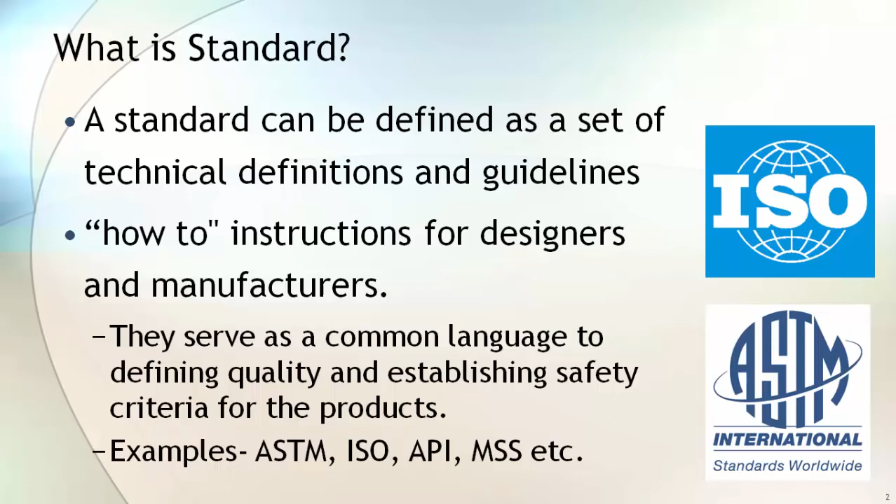ASTM, API, MSS, ISO are some of the examples of standards. ASTM has more than 12,000 standards. They cover almost everything. If you visit the ASTM website, they say they have a standard from toy to aircraft.

Why is this standard required? Let's take an example of a mobile phone travel charger. If you are in the US and traveling to India, you need an adapter to use this charger in India, as both the countries follow different standards for power sockets. But your USB cable will work anywhere in the world because it is manufactured as per a globally accepted standard.

In case of process industry, we want all the piping material, irrespective of their country of origin, to fit perfectly with each other when they come to the site. Standard helps to achieve this by establishing engineering or technical requirements for product, practice, method or operation. Standard builds confidence about product quality in the users. With standardization, cost of production will reduce as you can produce in bulk for a global market.

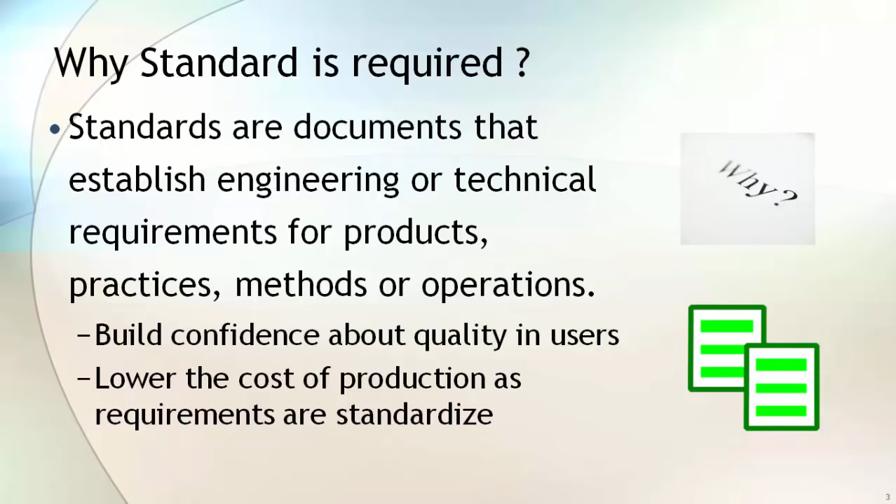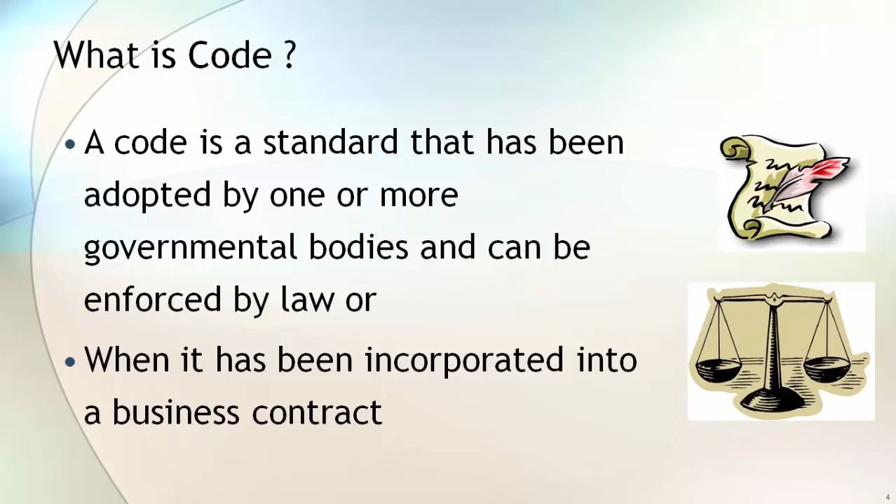When a standard is adopted by a government body and becomes legally enforceable, or when it has been incorporated into a business contract, the standard will become a code. ASME codes are legally enforceable in many US states, whereas other parts of the world have their own similar codes. Please note that the requirements mentioned in the code will only be mandatory if the code is adopted as a law by a regulatory body or if it is part of a business contract. Otherwise, code will serve as generally accepted guidelines for design, fabrication, construction and installation.

However, almost all process facilities follow various American codes and standards in addition to their national standard. Some examples of codes are ASME Boiler Pressure Vessel Code, British Standard, DIN, Indian Standard, etc. DIN is a German national standard.

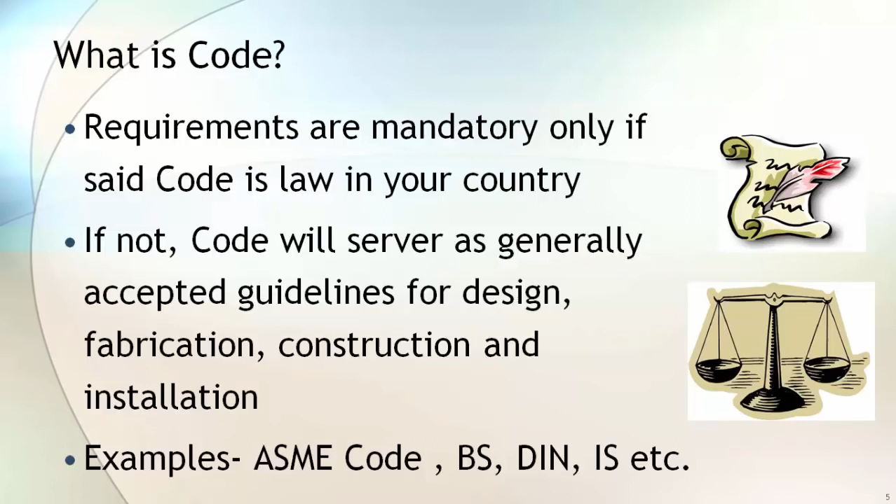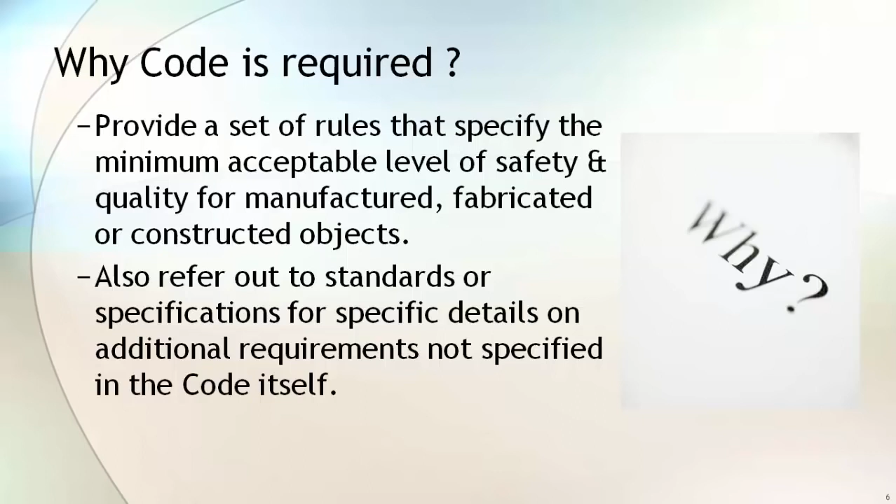Why is code required? Code provides a set of rules that specify the minimum acceptable level of safety and quality for manufactured, fabricated or constructed goods. It also refers to a standard or specification for specific details or additional requirements that are not specified in the code itself. What is specification?

Specification provides specific additional requirements for the material, components or service that are beyond the code or standard requirements. For example, if you want A106 Grade B pipe with maximum carbon of 0.23% against the standard requirement of 0.3% max, you have to specify your requirement in your specification or in a purchase order. Specifications are generally generated by private companies to address additional requirements applicable to specific products or services.

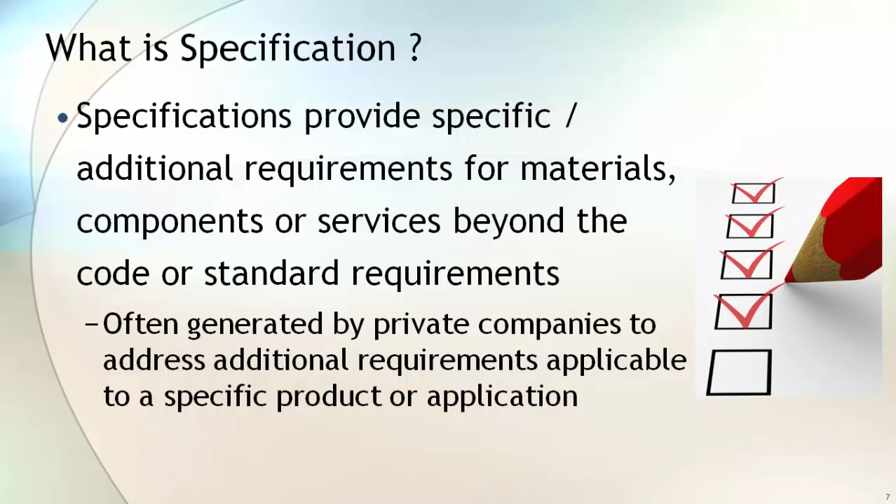Why is specification required? Specification allows the purchaser to include special requirements as per the design and service condition. It allows you to customize your product. Please note, requirements in specification are must-meet requirements.

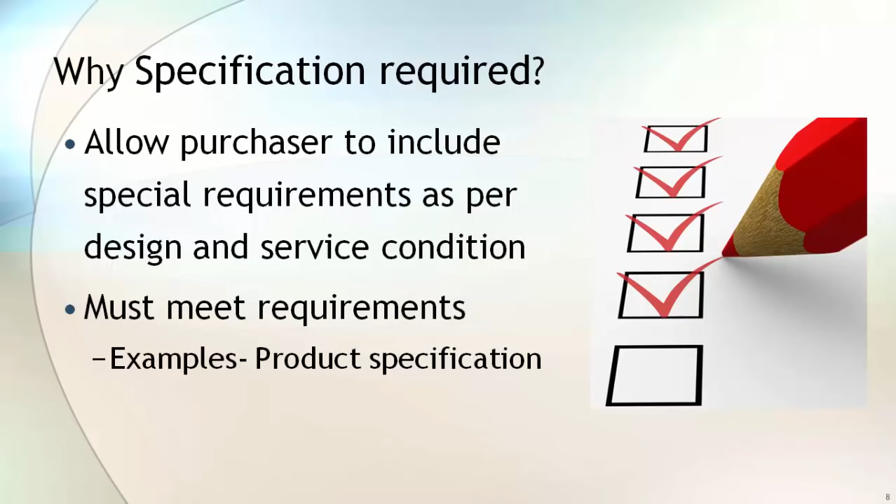To simplify understanding of code and standard, I have grouped them in three categories. First is system design code. This category of code provides entire system design requirements. ASME B31 series and ASME Section 8 are some examples of system design code.

Second is the material standard that provides standard material grades that can be used in manufacturing of piping components or any other systems. ASTM Section 1, Section 2, and ASME Section 2 cover various acceptable material grades that can be used in a system design. The last on the list is dimensional standard. Dimensional requirements of standard piping components are covered in various dimensional standards. ASME B16 series is an example of the various dimensional standards.

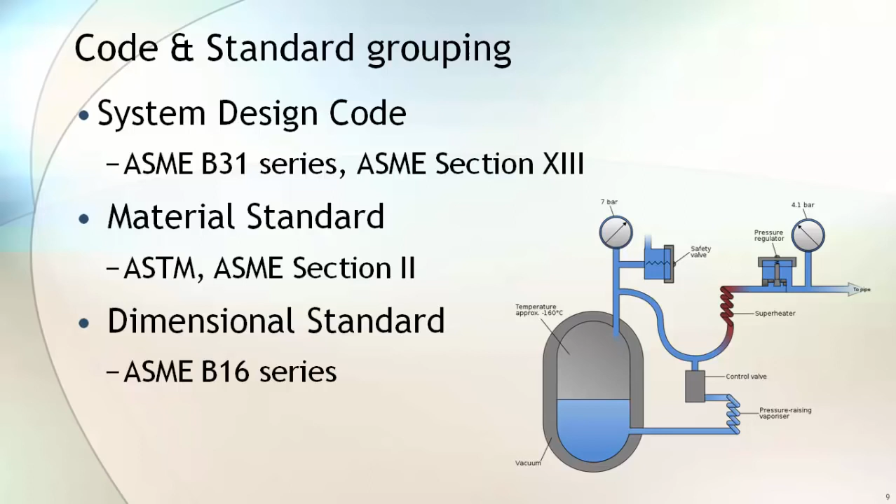To construct a safe and reliable process plant, you will require all three categories of code and standard during design, fabrication, construction and installation. System design code covers requirements for material that can be used in various process conditions, different types of components that can be used, how to design the system, how to fabricate and assemble, installation requirements, and it also covers the inspection and testing requirements for the entire system.

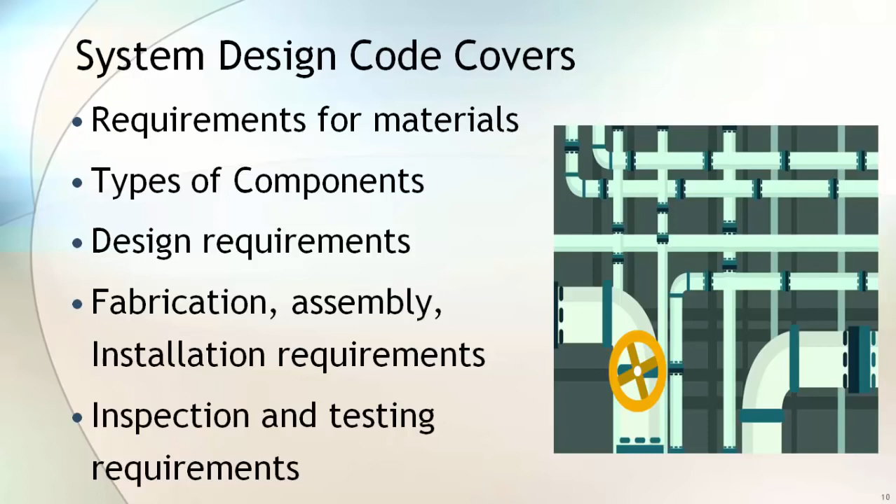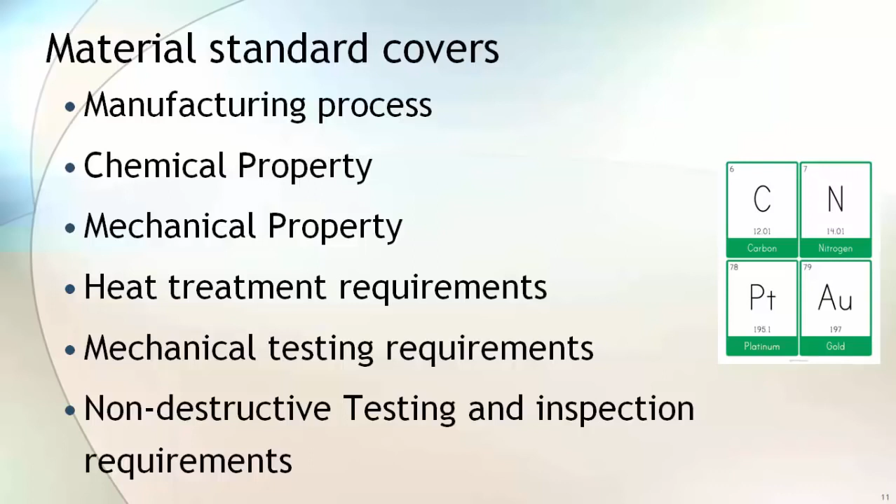Material standard covers the manufacturing process of raw material and the finished product. Material standard also gives the requirements for chemical and mechanical properties required in the finished product. It also suggests various heat treatments to be performed during the manufacturing of the product. Material standard also gives the requirements for mechanical testing, non-destructive testing and various inspection methods to be performed during the inspection of the product.

Material standard also gives the various acceptable tolerances of imperfection. When an imperfection is beyond the acceptable limit, it is known as a defect. Standard covers various defect repair methods and acceptance of that defect repair. Standard also gives the various marking requirements.

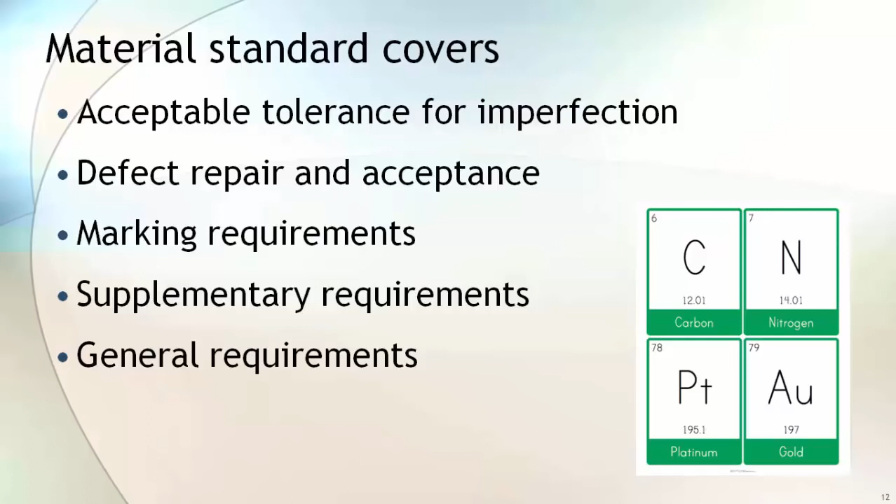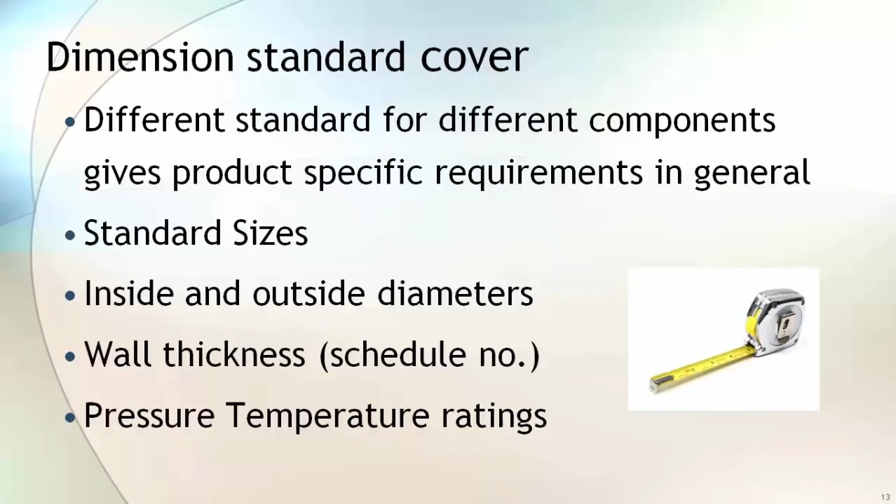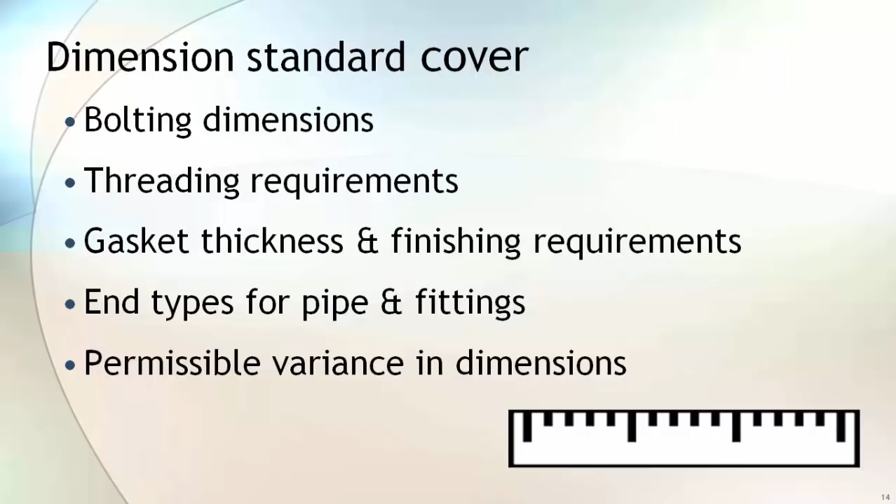Different dimension standards are used for different components. This standard gives product-specific requirements. In general, dimension standard provides size, inside-outside diameter, wall thickness, and pressure-temperature rating. For flanges, it also provides bolt hole diameter, various bolting requirements, threading requirements, gasket thickness and finishing requirements, and different types of ends for pipe and pipe fittings. Dimension standard also lists various permissible variations that are acceptable within the dimension requirement.

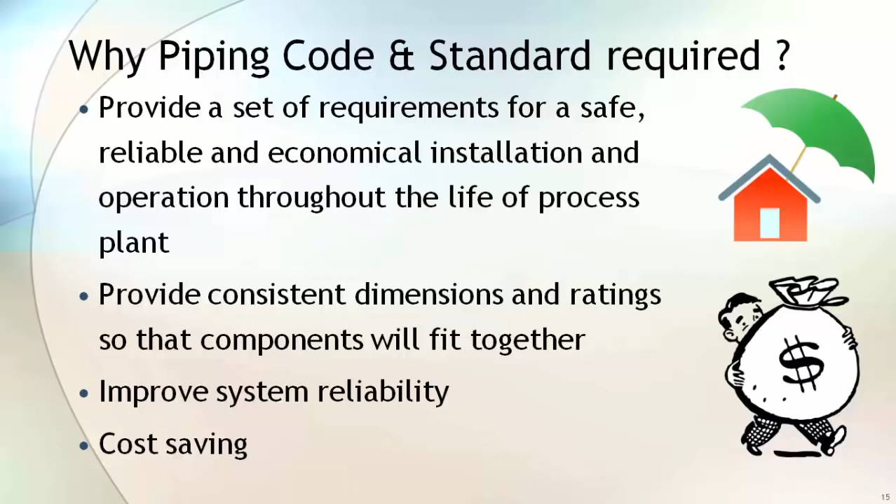Why are piping code and standard required? This standard provides a set of requirements for safe, reliable and economical installation and operation of the process plant. Code and standard ensure consistent dimension and rating so that components will fit together and improve system reliability. With standard components, less inventory is required and that saves cost also.

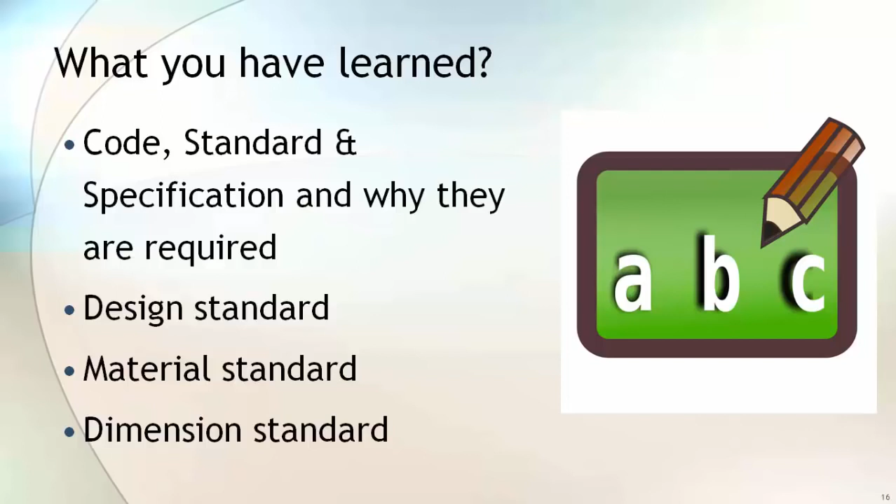Let's summarize what you have learned in this lecture. You learned about code, standard and specification and why they are required, and also about design standard, material standard and dimension standard, and what these three categories of standard cover. Refer to the resource section of this lecture to have a look at applicable codes and standards used in process industry.